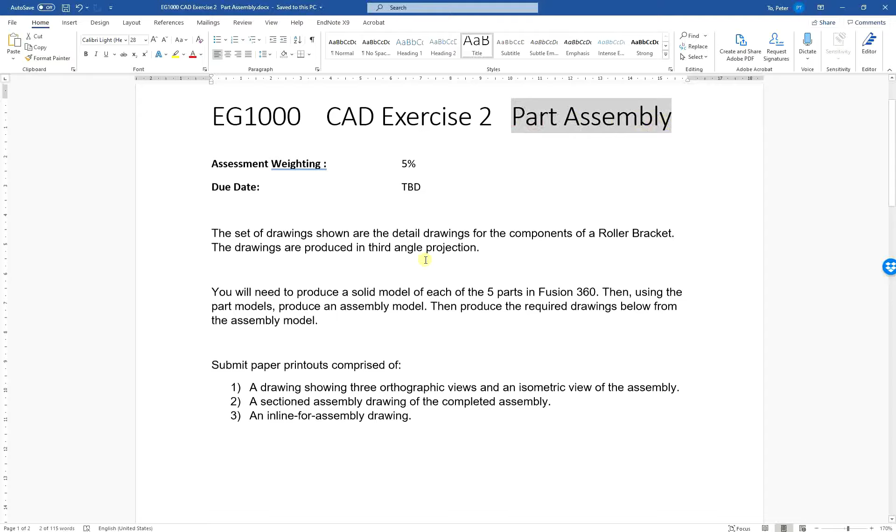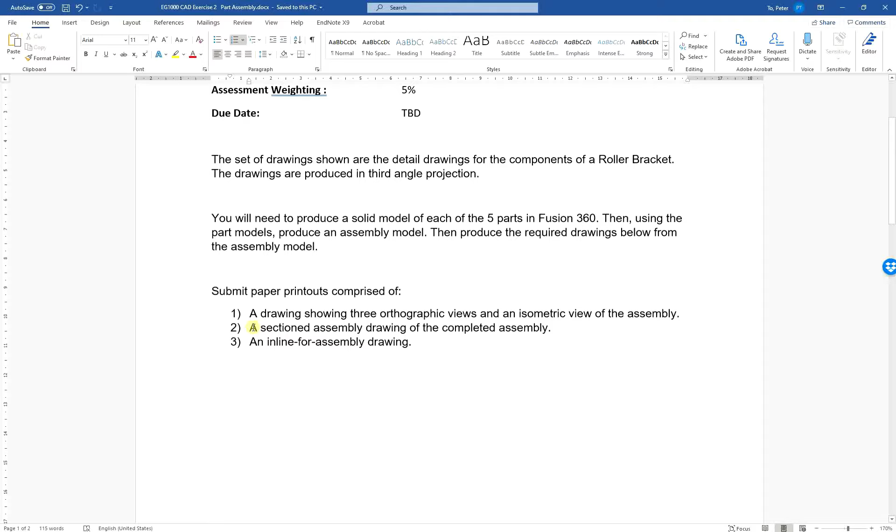In this tutorial, we are going to draw 5 parts in Fusion 360. It is used for the submission at the end of the tutorial, where you need 3 drawings: one with orthographic and isometric views, one with section assembly, and one inline for assembly drawing.

Let's start by looking at the 5 parts first. Here are the details with dimensions: bracket, base, roller, bush, and spindle. Normally we'd start from detail number 1, the bracket, but it seems more complicated than the other details, so I will start from the base instead.

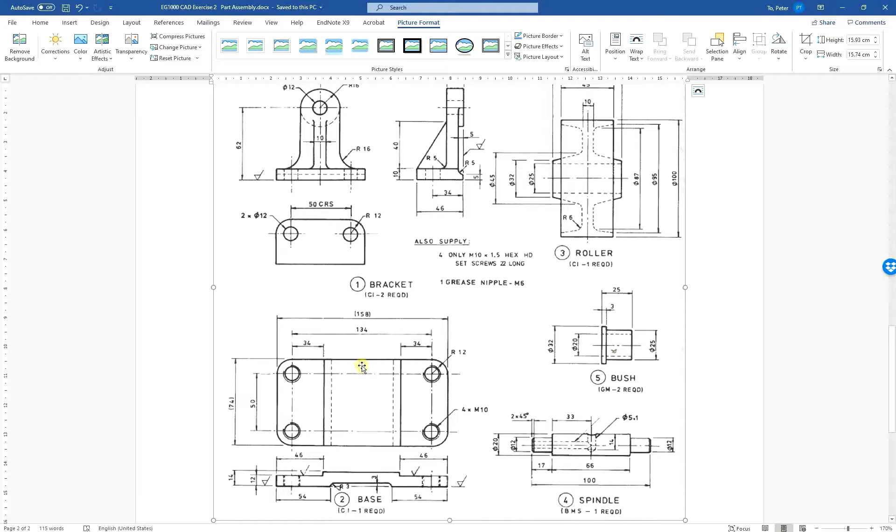I will draw the front cross section first, and then extrude it by the depth to get the detail. Now let's start with Fusion 360.

In the first step, I need to make a sketch, and because I'm drawing the front view, I click on the front plane. Now I use my line tool to draw the outline of the cross section. The dimensions are given in the project views, so just have a look and calculate the required dimensions for your drawing.

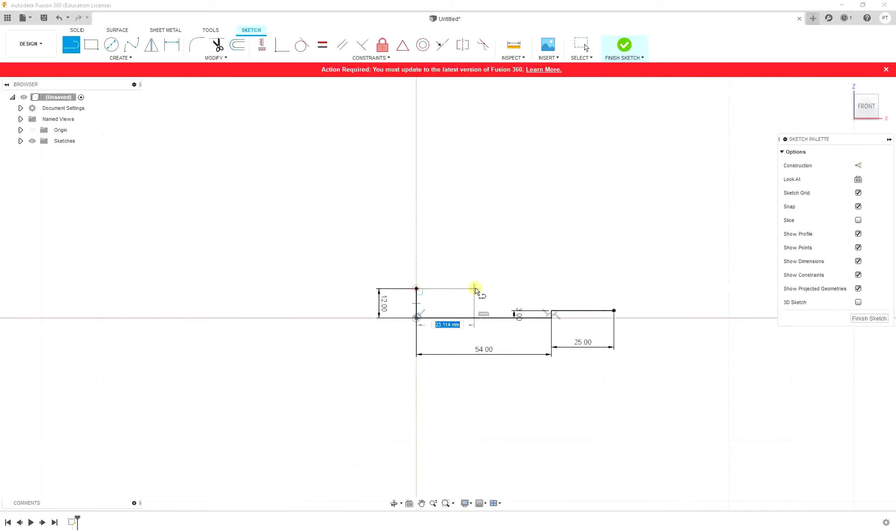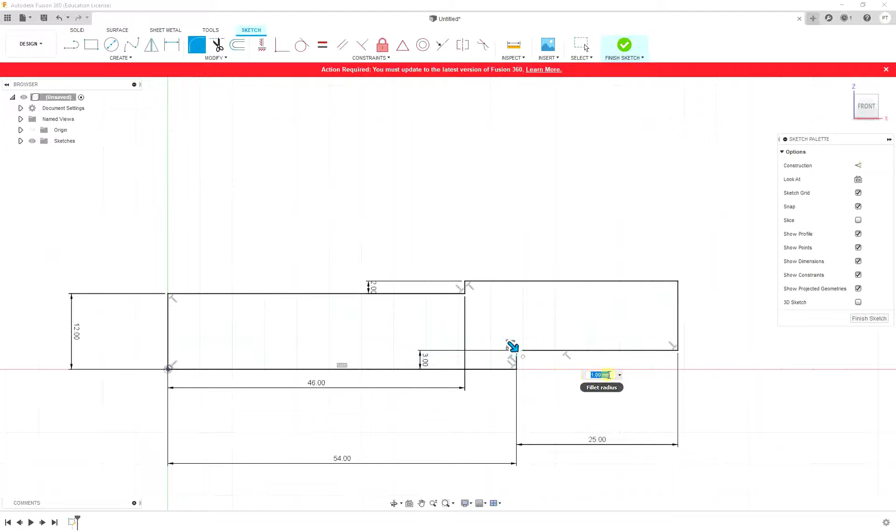Now I've finished half of the cross section, and what I need to do is the fillet here. However, if I do the fillet with a radius of 3 millimeters, it gives an error, because the fillet is too big and one line will disappear. So you shouldn't use fillet for this.

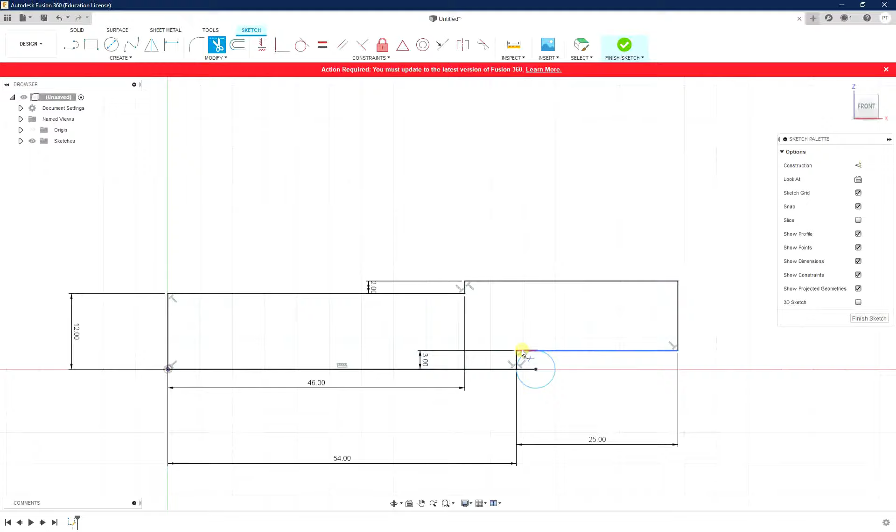The best way is to draw the center of the fillet first, then draw a circle, and then trim the unnecessary part. Just trim, or press the key T. Please try to use the hotkey because it will save you a lot of drawing time.

Now I delete the unnecessary part. Now I can just mirror to get the whole cross section, so I select everything and deselect the middle line. Now I select the middle line and I have everything done. I delete the middle line because I don't need it for the cross section, then click on the corner between the top, front, and right view, and finish my sketch.

Now I can extrude it, and the depth is 74 millimeters.

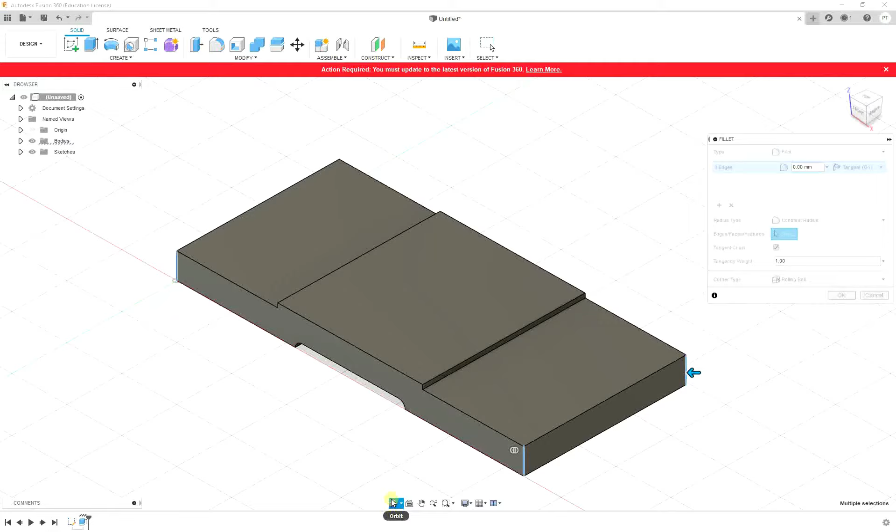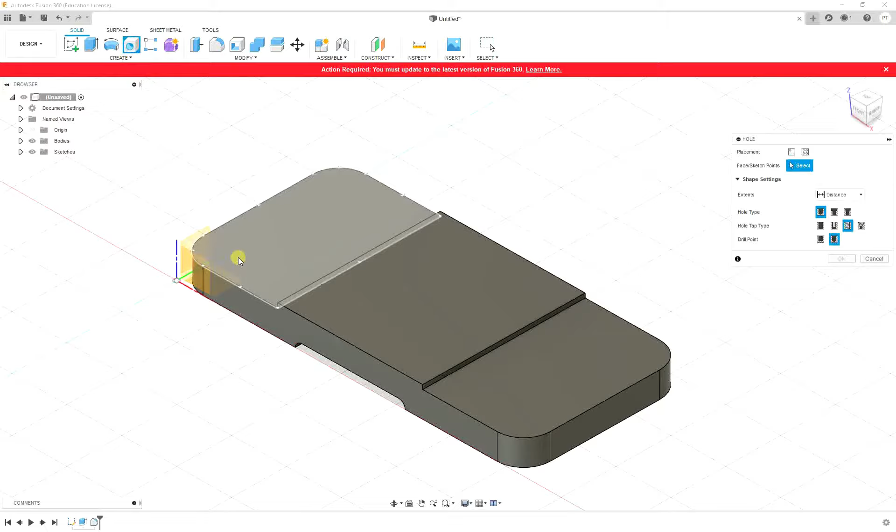Now I need to do the fillet for the corner. I click on fillet and select the corner I want to round. Please use the orbit tool to rotate to the other corner if you can't see it. The fillet radius is 12 millimeters. Please go back to the corner we want to look at - that's the default view for me because it's easier to see the detail.

Now in the next step, I need to draw a hole, and move the hole to the center of the fillet. I select the type of hole to get the right thread for it - everything is set because I've done this previously, so just select the right size and thread step for your hole.

Now we need to duplicate it, so we click on array and make an array of 2 by 2. Select the direction first, drag it, set it to 2, and the distance is given as 134. The same applies to the other direction - drag it, set it to 2, and set the dimension to 50.

So now we already have the detail, and we just save it. I save it to another project, so exercise 2, and enter the drawing name so I won't be confused later - so, base.

Okay, now let's have a look at the next detail. I'm going to draw the roller. My strategy is to draw the cross section first and then revolve it about the middle axis. I can also draw just half of the cross section and then make a mirror.

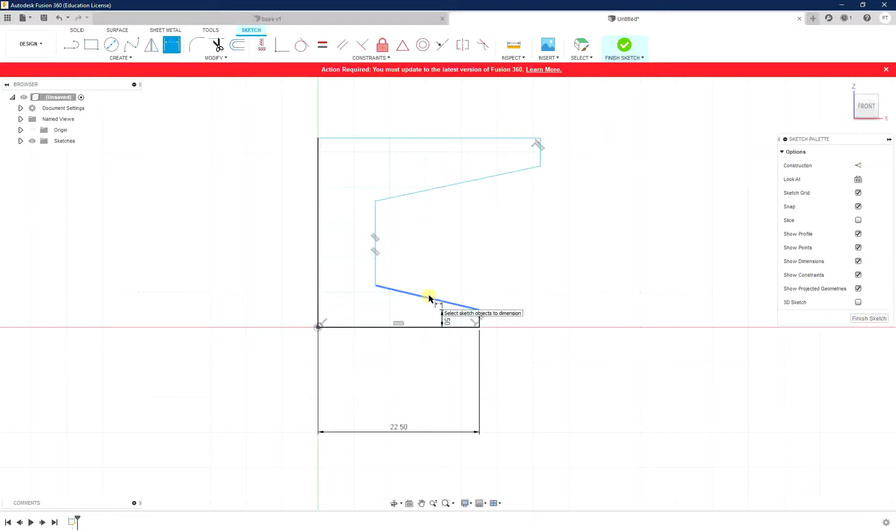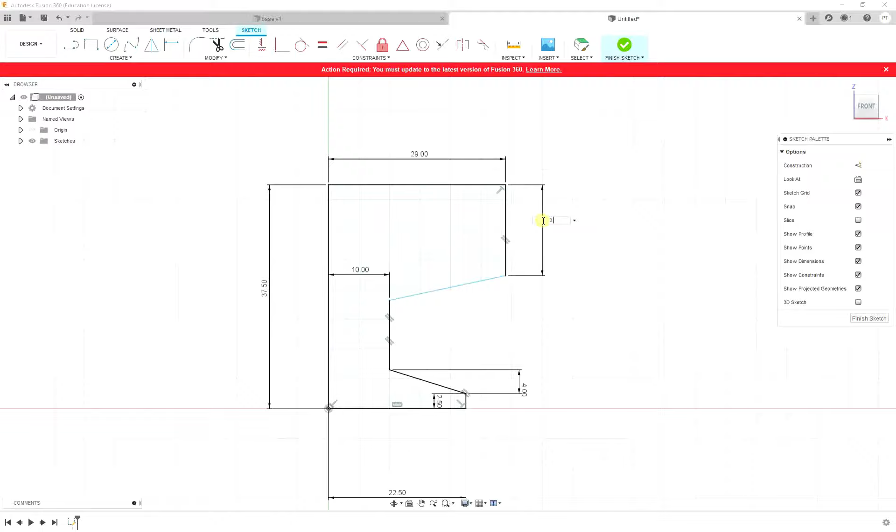Okay, now I need to set the dimension to have the correct size. The last one I forgot. So 45 minus 32 divided by 2.

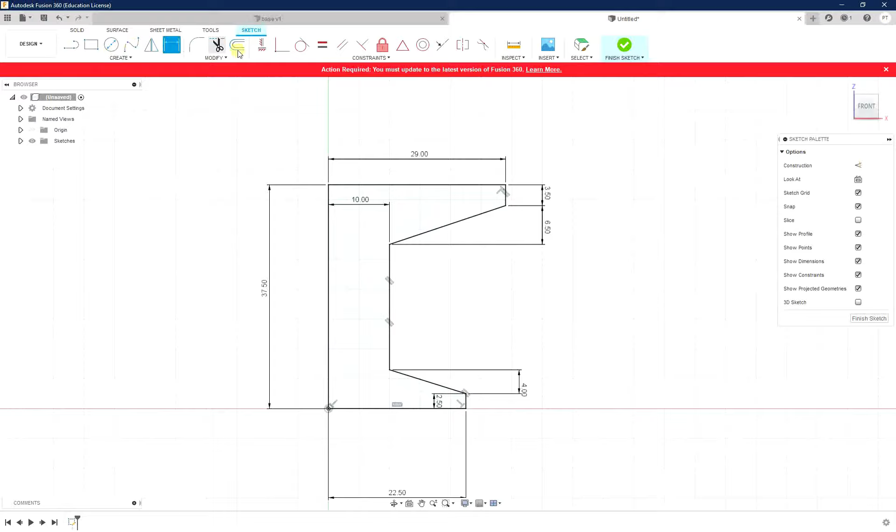Yep, I think it's okay to me. So in the next step, I need to do the fillet for the round corner. Click on fillet and click on the point, and ignore the warning message because you're going to lose some connections, but that's okay.

Let's double check. It seems fine to me. So now just mirror. You can select all and deselect the middle line as you did before, or you can select one by one. And then select the middle line. Here is my cross section area.

Now what I need to do is draw a middle axis on the top. If you set the dimensions to something with no connection like this, it will move the line, not the axis, so that's not what we need. Even when you try to change the order, it always moves something loose first, so therefore it's not what we need. You should start from something that has been grounded.

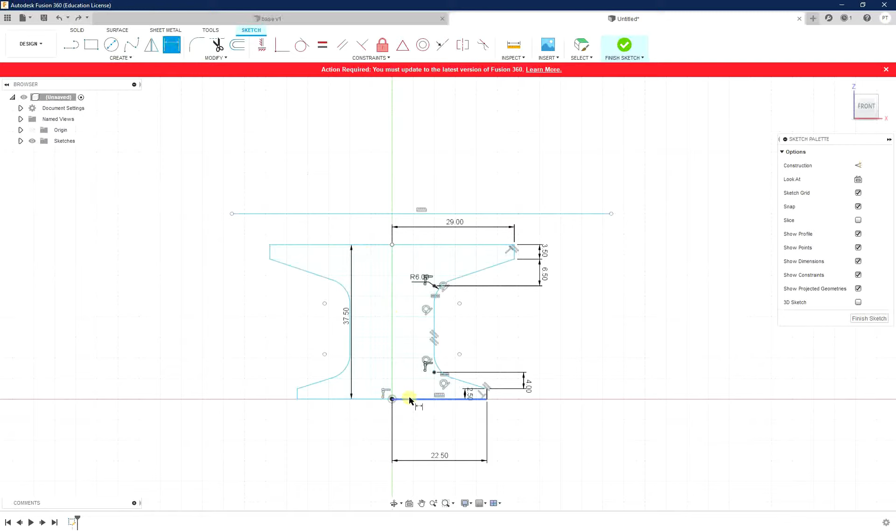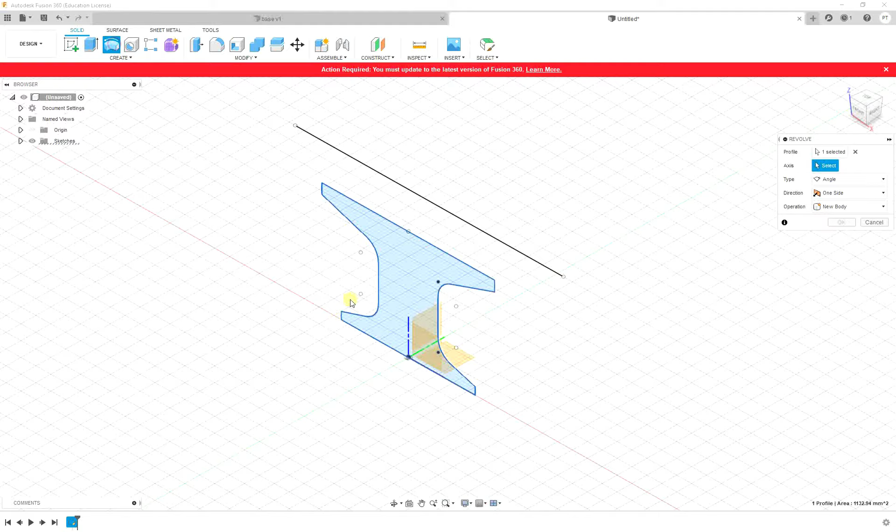So select this line and the axis and set it to 50. Now I have the cross section and the middle axis. I can revolve it, just finish my sketch. Then go to the corner and click on revolve. I already selected the sketch, so I just select the axis, and here is my detail.

Yep, have a look around. I think it seems good to me. Let's save it, as the roller. And done. Now let's have a look at the next detail, which would be the spindle, but the spindle may be more difficult than the bush, so I try to draw the bush first.

Like I did with the roller, I just draw the cross-section area first and then revolve about the middle axis.

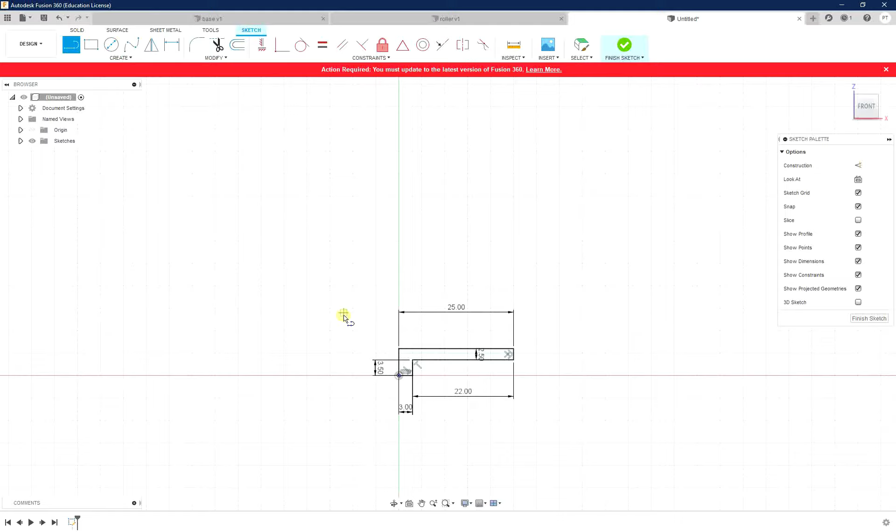Okay, so the 16. I think I'm done. Now just revolve it. Go to the default corner and then revolve. Here is my bush. I think I have no problem with this.

I can save it now. Yep.

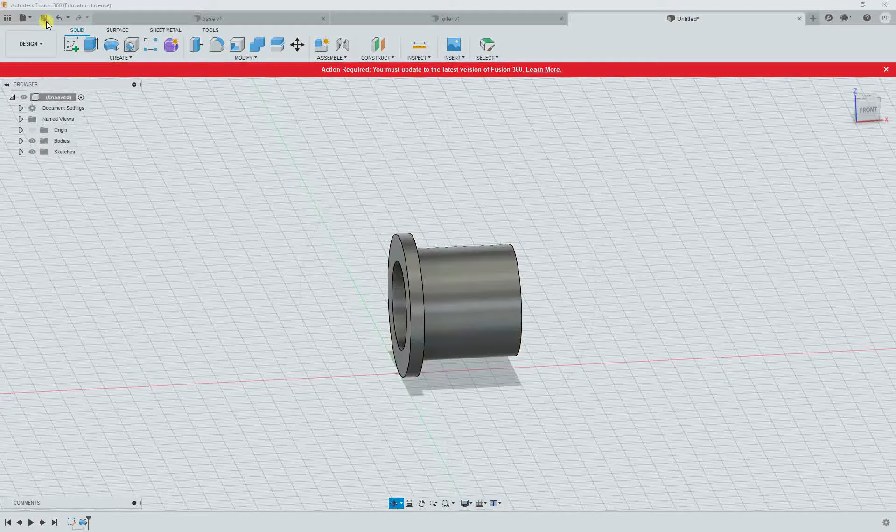Okay, let's have a look at the next detail, which is a spindle. We are going to do some revolving about the middle axis first, and then do some hole into the detail.

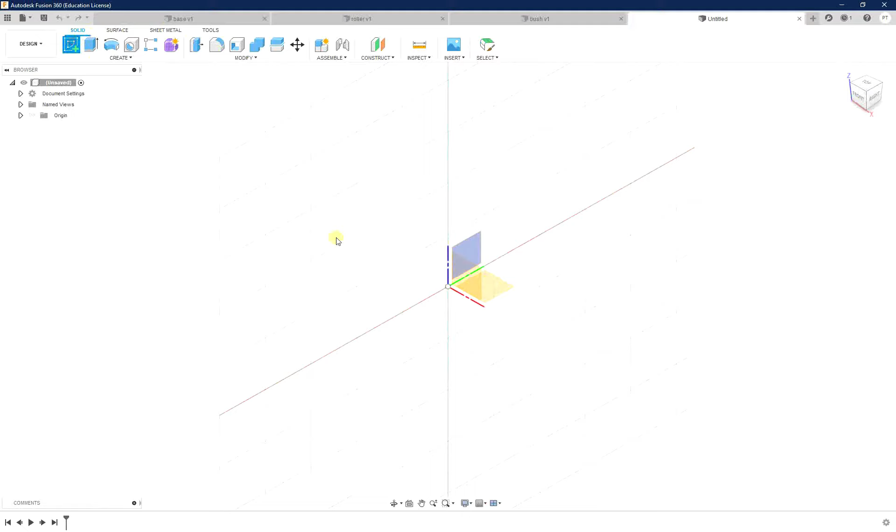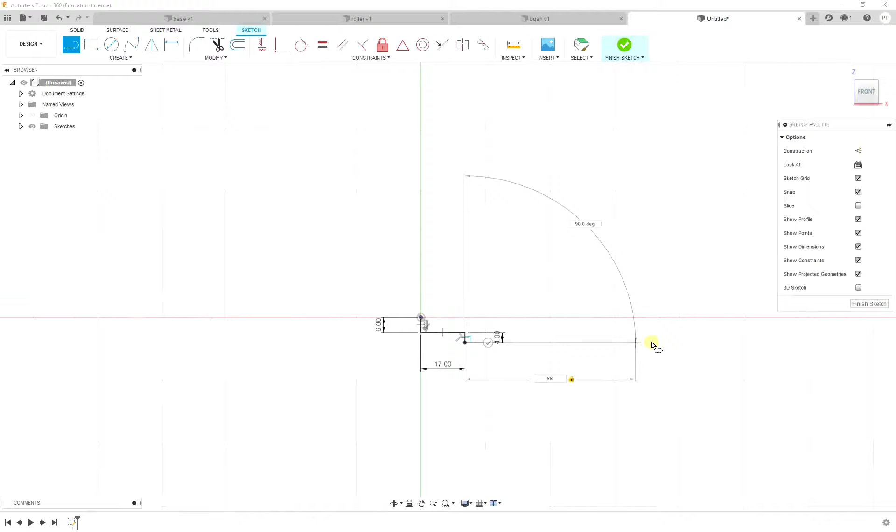So in the next step, we need to create a sketch. Like we did before, we use the line tool to draw the outline of the detail. A good tip here is if you don't press enter, but just left click, you can keep drawing the line without re-entering the hotkey L for line. I found it quite handy.

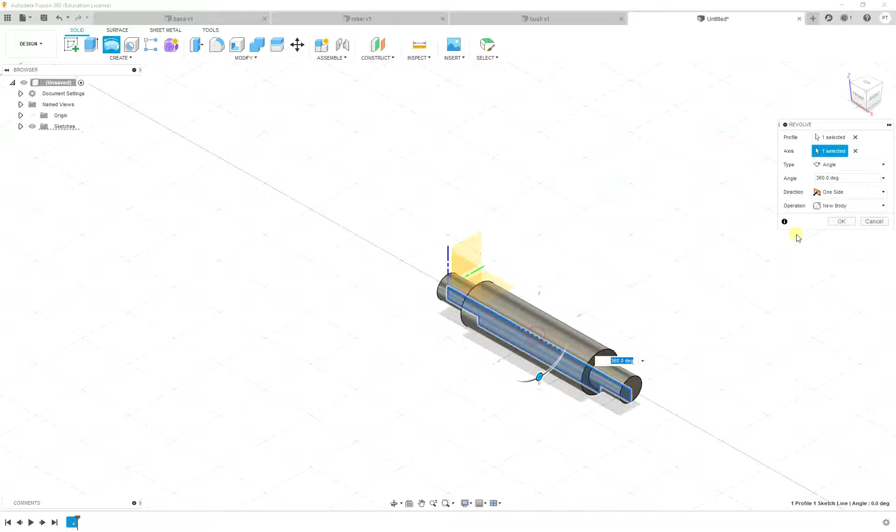So here is a cross section, and we just do the revolvement about the middle axis, and here is the detail. Now we need to do the chamfer at this corner and this corner. So just click on modify and select chamfer, select the corner you want, and select the distance you want to do the chamfer. You can click on inspect to see if it's really a 2mm chamfer.

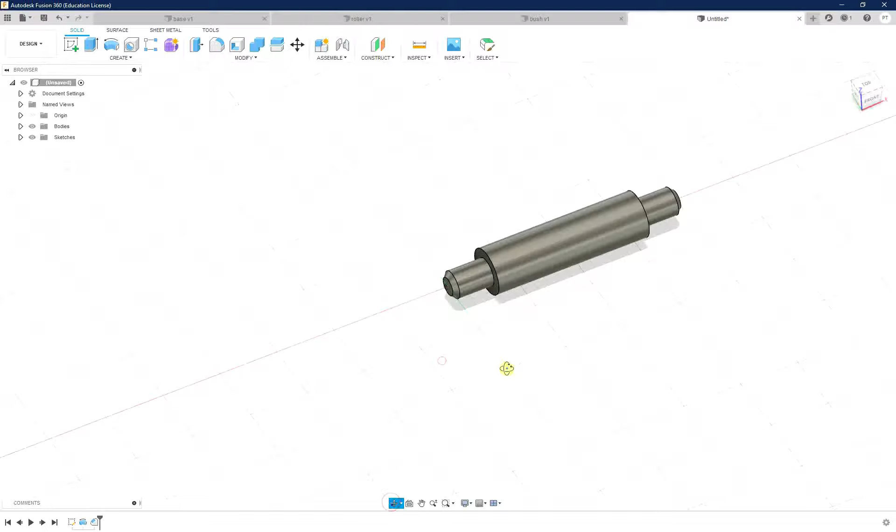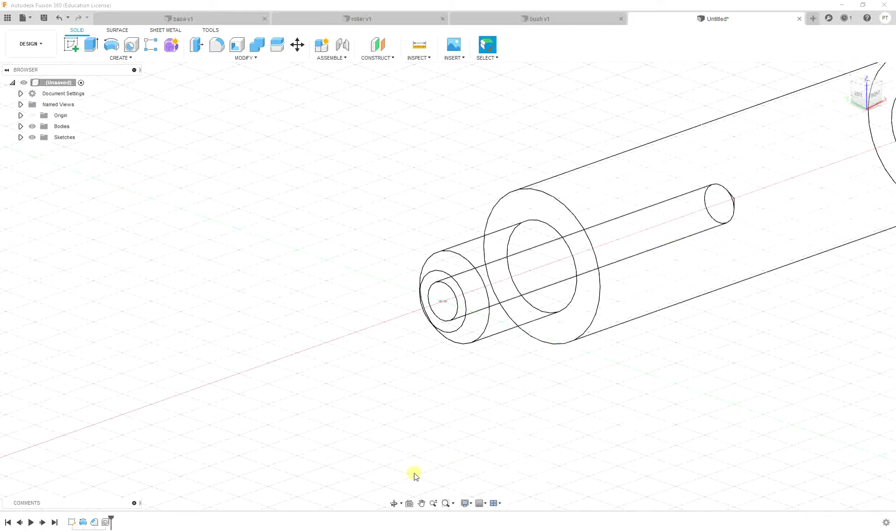In the next step, we need to create two holes on the detail. So I use orbit to rotate to the side where I want to create the hole, click on hole, and move my hole to the correct position and enter the right dimension for my hole. You can double check the hole by clicking on visual style and then using wireframe to see if your hole is correctly created. I think it's fine to me.

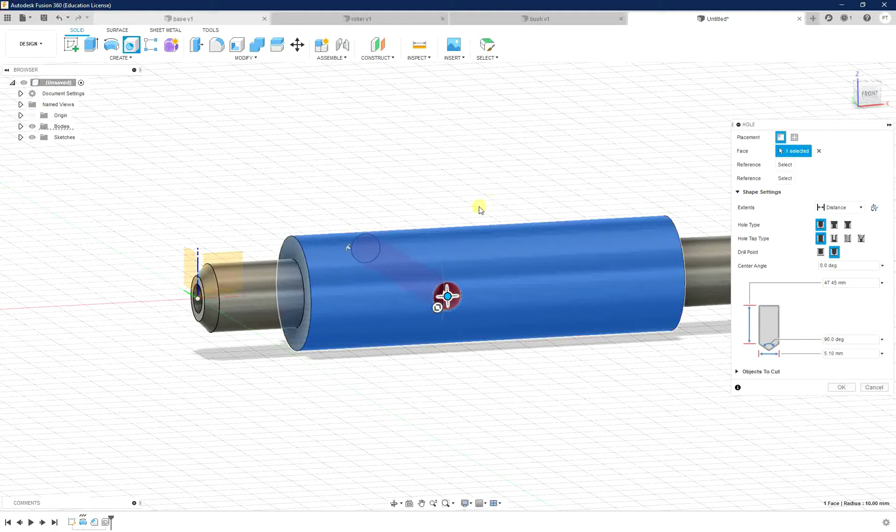Okay, so now I've moved back to the old visual style. In the next step, I need to create a hole from the top to the bottom. So if you click somewhere, it will make a perpendicular hole to the plane you choose. So my first step, I need to go back to the normal one, click on hole and click on the top to get the vertical hole down to the bottom.

And now I need to select the right type and the right reference for the positions. So I set it about 50 millimeters from the end.

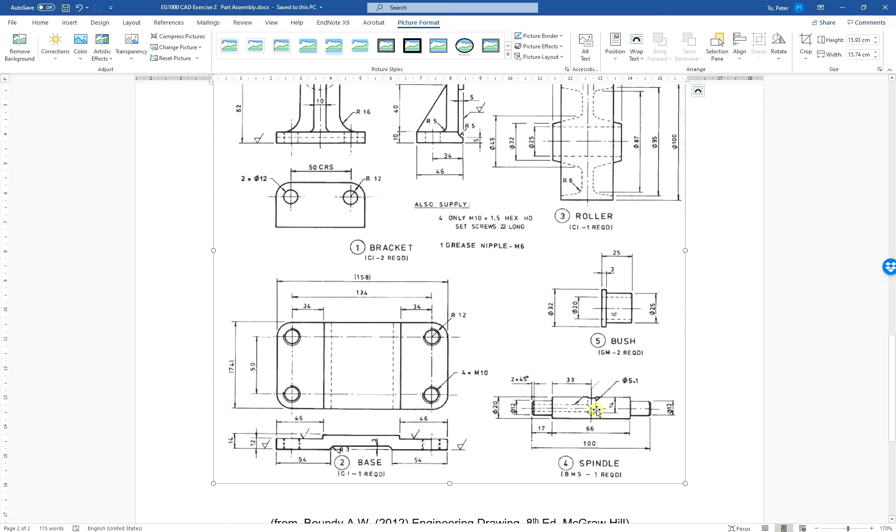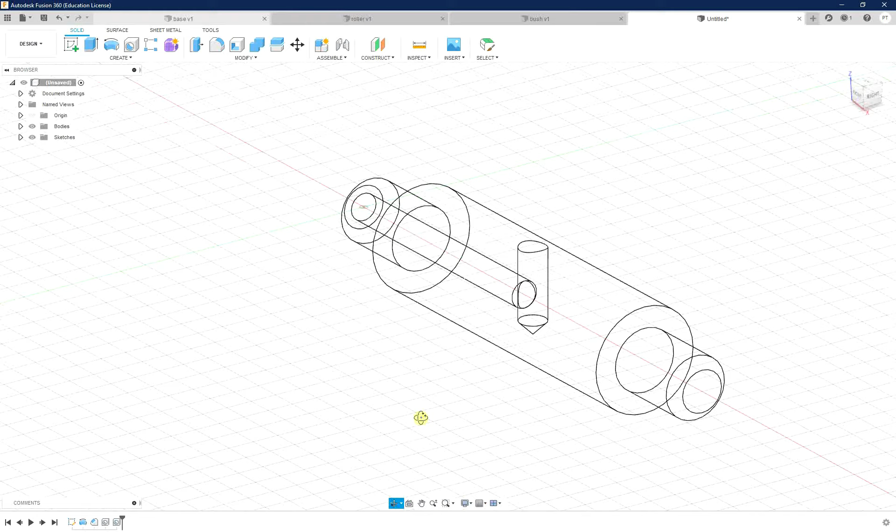And the right size for the hole. Let's double check it. Yeah, it's 14 without the nozzle. Yep, seems good to me. So we can double check it by going to the wireframe and rotating. I think it's fine to me.

Now we can just save it and move to the next detail. So the last detail we need to draw is the bracket, which is complicated. I will draw the base first, then draw the wall, and draw the other details later.

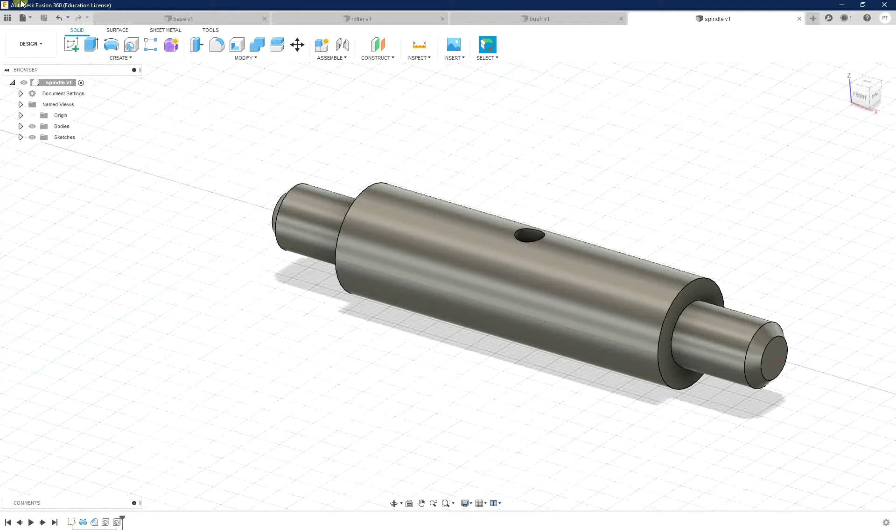So let's start from the base of the bracket. In the first step, we need to create a sketch, and I choose the bottom plane.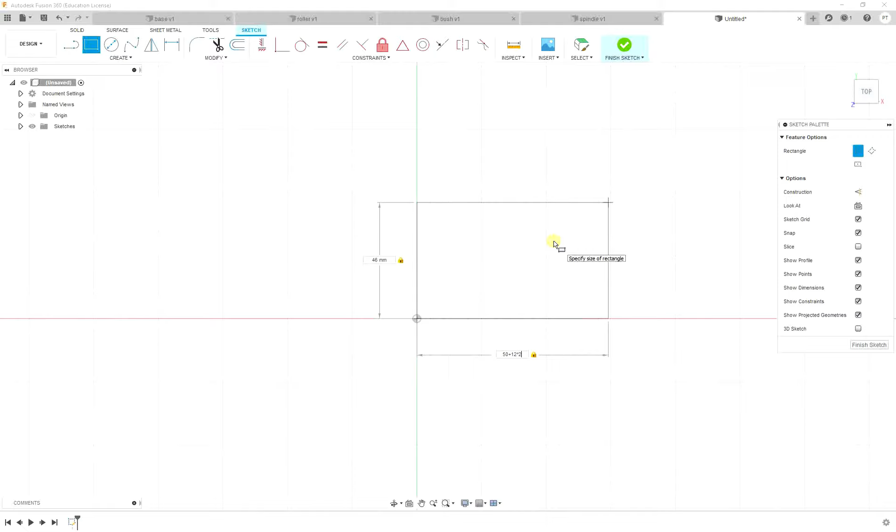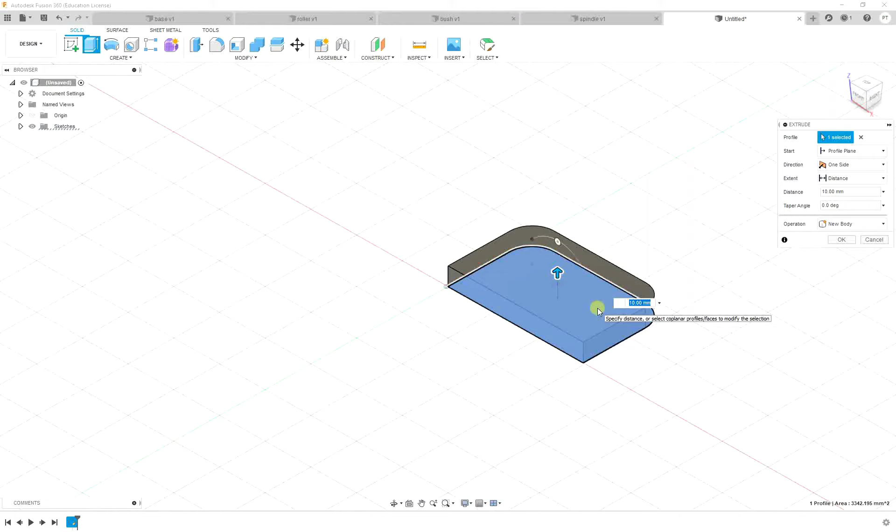I can do the fillet now and enter the radius as 12 millimeters, and I can extrude to get the base of the bracket.

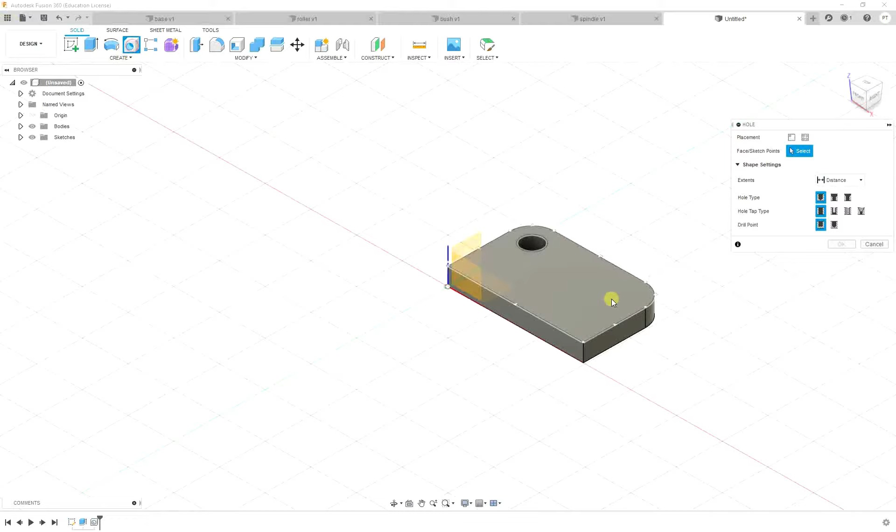Now I can create two holes on the top. Click somewhere first and then drag it to the right position. I think its diameter is 12 millimeters, so that's okay to me. And I can make a pattern, or I copy, or I just create a new one.

So here is the base. Now I need to draw the cutoff. This cutoff will have a radius of 5 millimeters.

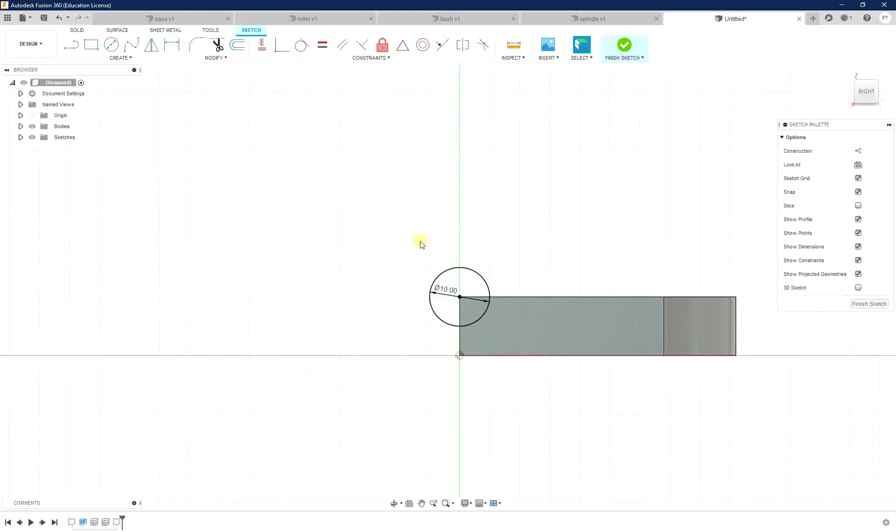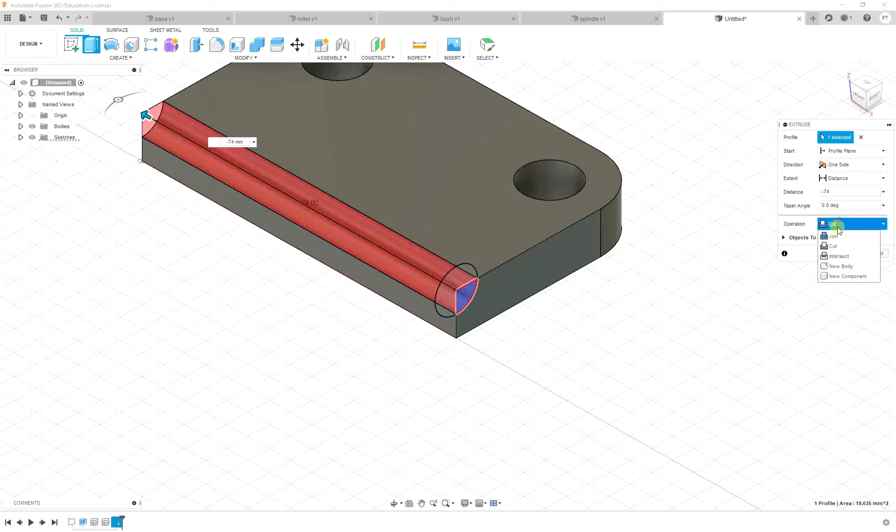And now I can extrude cut. Just go to the right corner first, and then extrude. Because you extrude to the other side, you must enter the minus value. And that is for me.

So now I'm going to draw the vertical wall on this face. I create a rectangle on this face, and I set dimensions to it.

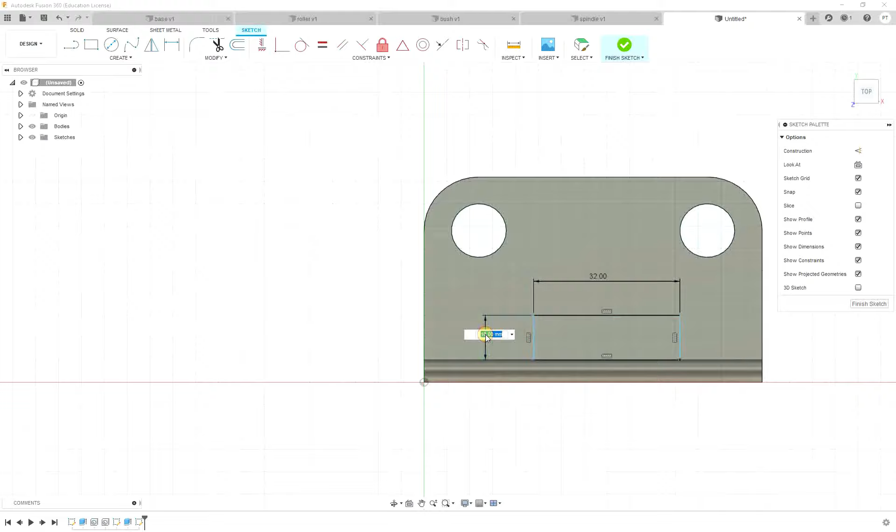So it is 32 by 9. It's quite handy that in SolidWorks and in Fusion 360, you can enter the formula for dimensions.

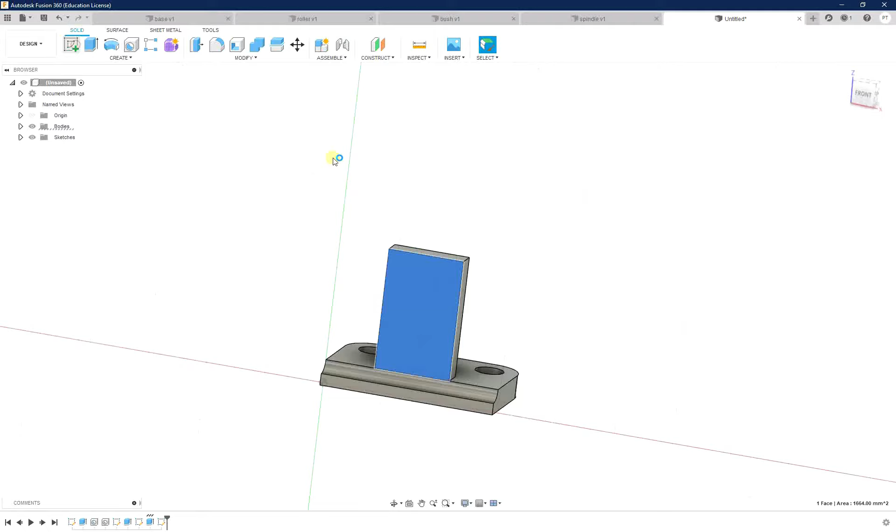And now I can extrude it up to get the wall. Now I need to draw the circular head of this one. I select the middle point and draw the circle.

Now I can extrude it. The different thing is that I can extrude both sides. For the main side, I extrude by 5 millimeters, and for the opposite side, I extrude by 9 millimeters.

I forgot to make the join. Let's click again, extrude, two sides: 5 millimeters for one side and 9 millimeters for the other side. Please select join so it will have the same body.

Now we need to cut off the thing in the middle first. Just click on the face and then extrude cut by 9 millimeters. Yep.

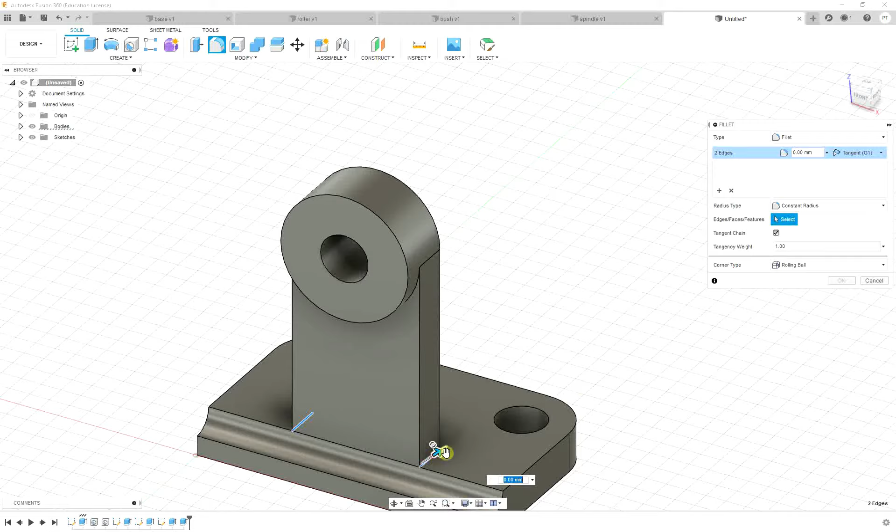Now I can do fillet for the bottom corner. Now I need to draw the last detail. The one from this side would be this one.

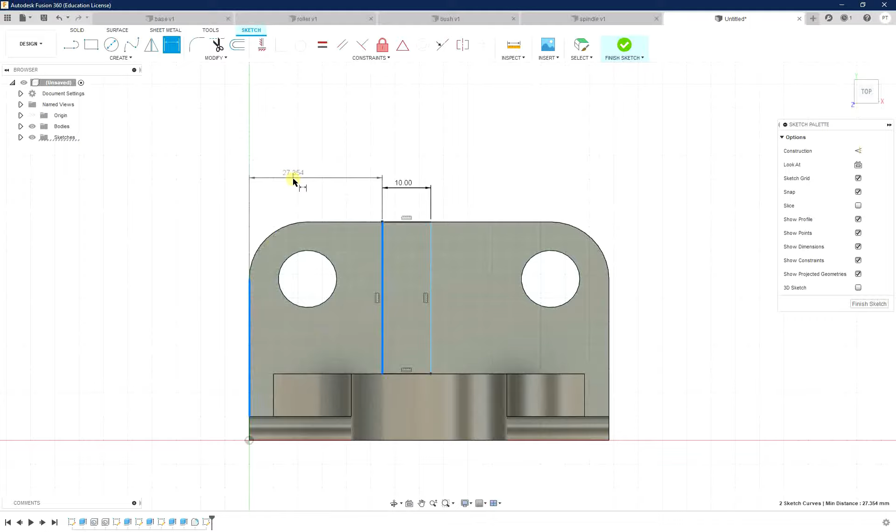The height of the prism is about 40 millimeters. So I need to draw a rectangle on this face first. The dimensions were 10, and it is at the middle.

It's good to me. Now I can extrude it up and then cut it off later to get a triangle cross section. I need my corner - okay, just use orbit.

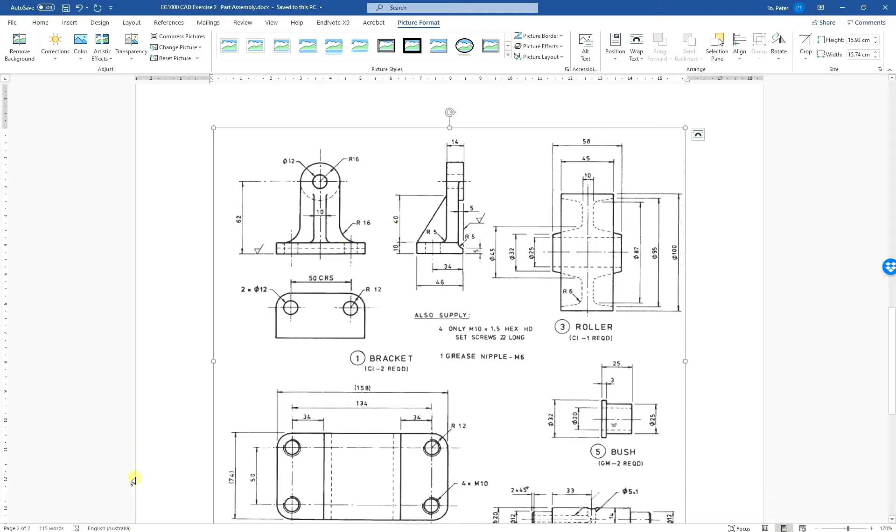Now I can extrude it up by 40 millimeters. Yep, 40 millimeters.

If you use a taper angle, you will get it in the wrong direction. So therefore, I recommend you use 40 first and then back to 0. I recommend you use the cut off later because the taper angle is not the right option for you.

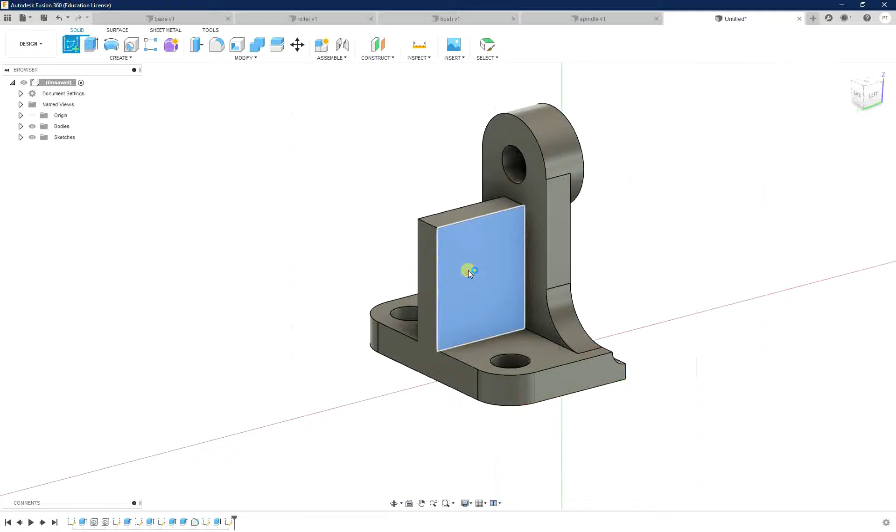Just draw a line to divide this cross section into 2 parts, and then extrude cut one. Yep, so I think it's fine.

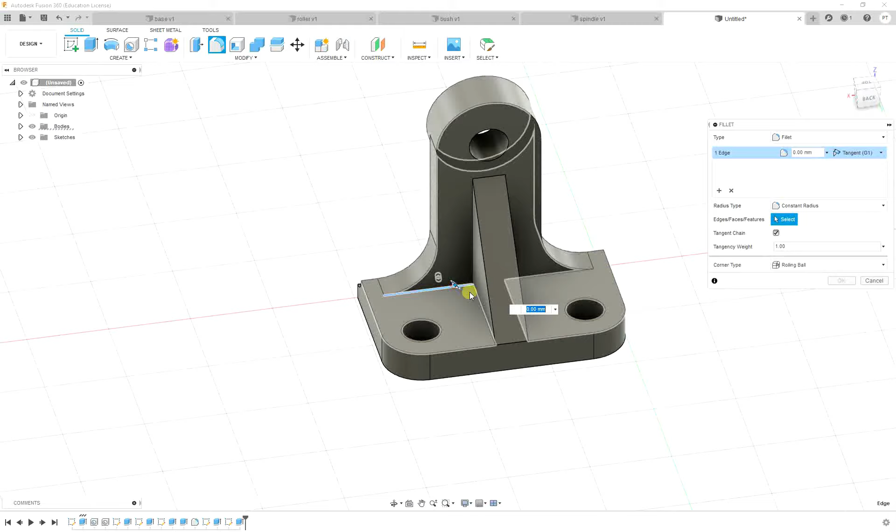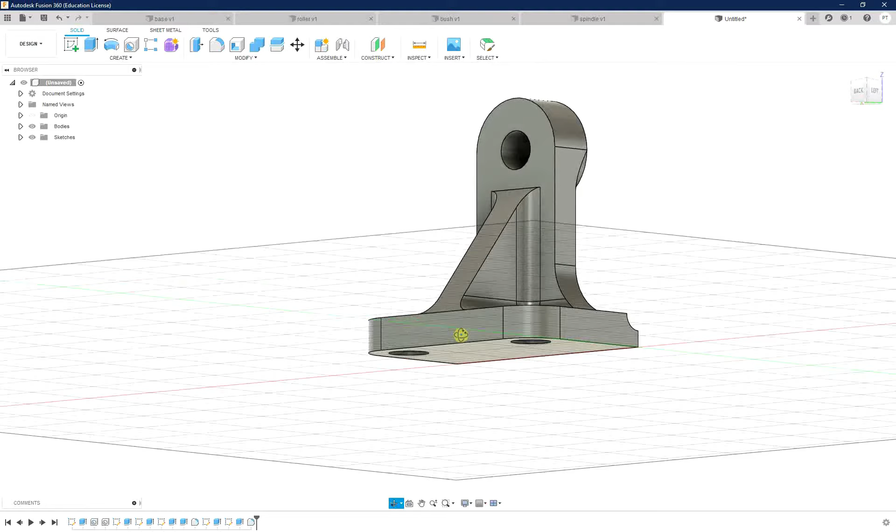Now the last step is to fillet the corner. So I select all of the required corners and enter the radius. I think they are all good to me. This is the bracket I need, and I can just save it.

At this step, we finish all 5 parts, and we are going to do the assembly in the next part of the tutorial. Thank you very much for your attention, and see you next time.